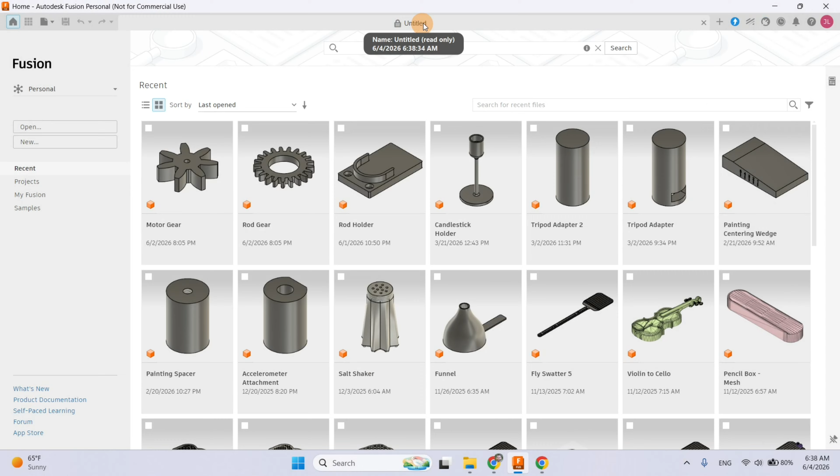If for some reason you ended up on the home page, just come back and click on this tab for your new untitled design. So this is what a blank canvas looks like. And you can create multiple designs at once.

If you're creating a new design, in this case, let's just go with a part design. The difference is that parts are for simple, single objects, and assembly is where you would import multiple parts, so multiple standalone pieces, and assemble them together. Then hybrid is just a combination of those two. I haven't really used hybrid, that's actually relatively new on Fusion. They do a good job of updating it frequently, whether that's for better or for worse.

But we're just going to go to part design, create new. And I actually want to open up and import those STLs that I just created.

One easy way to do it, I'll show you here real quick. I don't want you to be overwhelmed, but you have multiple tabs up here, and you also have multiple functions within Fusion on the drop down. We're just going to stay within Design the whole time, and we're just going to stay within Solid the whole time. If you don't want to be overwhelmed, just Design and Solid is all you need for right now to get started. But we're going to go Insert, and we'll do Insert Mesh.

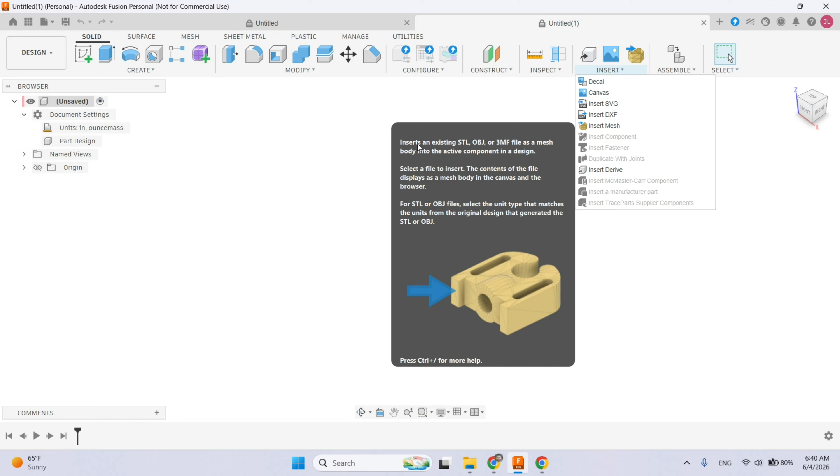The nice thing about Fusion is it has really good tooltips that pop up. You can see right here on the left, it tells you that this is good for inserting an existing STL or 3MF file. We downloaded some STLs, so that's what we want to insert.

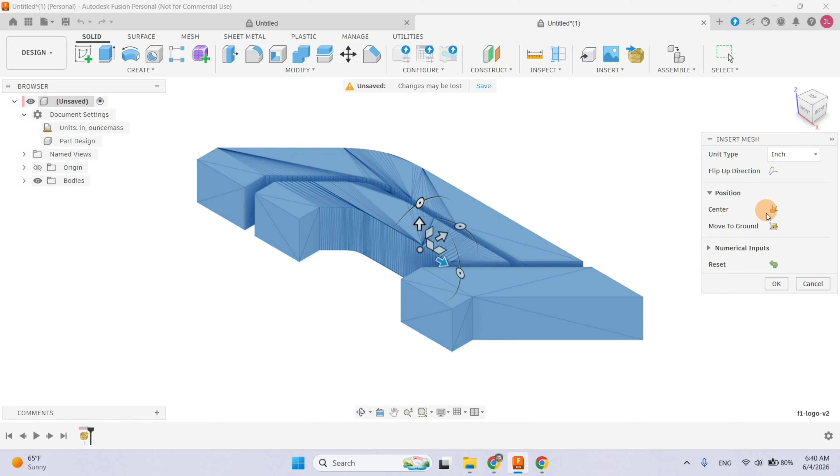We'll go select from my computer, because we didn't save these on the cloud. Let's just start with the F1 logo. We're going to open it up. Over here, we get all the options for the tool, like we could change the units that we're importing in. Let's just hit OK, and that's going to finish importing this.

Not sure if you know this, but the way an STL file works is it's just composed of a bunch of little triangles. You can see all the triangle faces right here. That is okay, we can leave the triangles there for now, and that'll be fine.

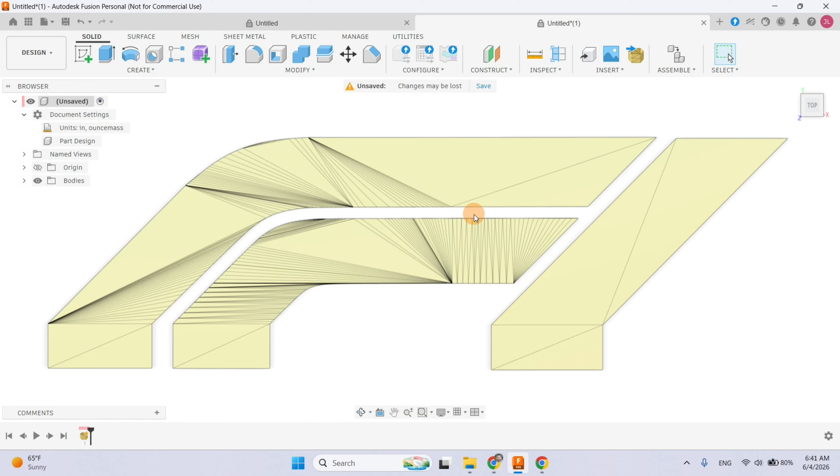But what we want to do is just recreate this design over here in our other Untitled tab. That's what I want to show you how to do, because I think the best way to start is just recreate some simple designs that somebody else has made if you can't think of any ideas on your own. If you can think of ideas, then go ahead, you don't need to copy somebody else, but it's totally okay too if you want.

All right, so this is going to be fairly simple, and I will show you how we can do this. We're over here in the Design, Solid tab, and the way you start in CAD is you create a sketch. A sketch is going to be a two-dimensional drawing, essentially, of what you want to create, and then you can create 3D geometry from there.

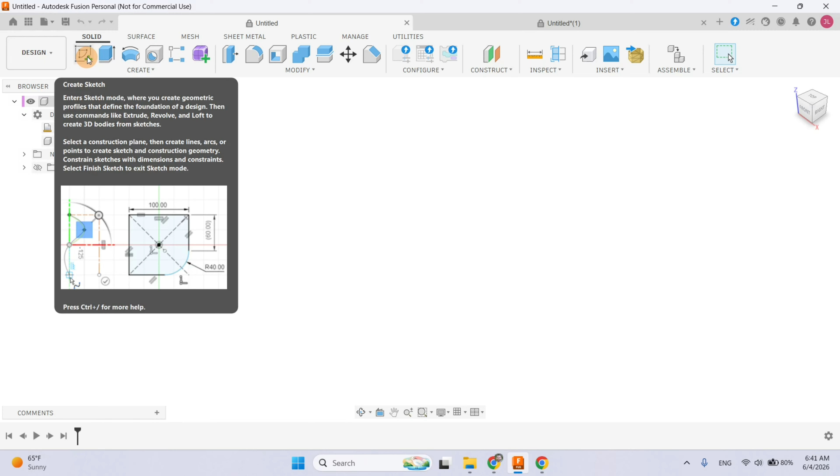But let's just create a sketch, and it's going to ask you which plane you want to start that sketch on. Also, I'll just go back a little bit. Your Fusion probably looks slightly different from mine, and that doesn't matter, that's okay.

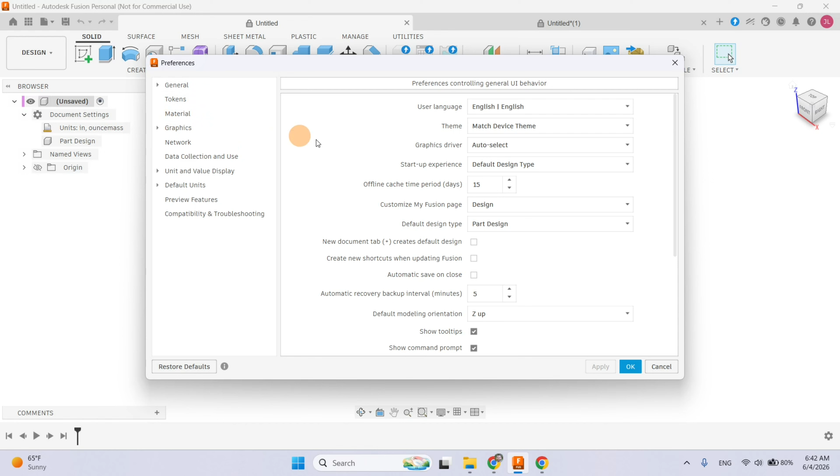But if you want it to look the same, then you can come over here to the person icon where you're signed in and go to Preferences. One of the biggest things that I did was remove the grid that sits behind. Yeah, if I can even find it.

Okay, so I was looking around for a little bit to find everything, but if you want your controls to exactly match mine, then you'll just go into Preferences, General, and the shortcuts for pan, zoom, and orbit. That's going to be how you move in and out from your part, how you drag the screen around, and everything. There are certain defaults, it's surely going to be set on Fusion when you first open this up.

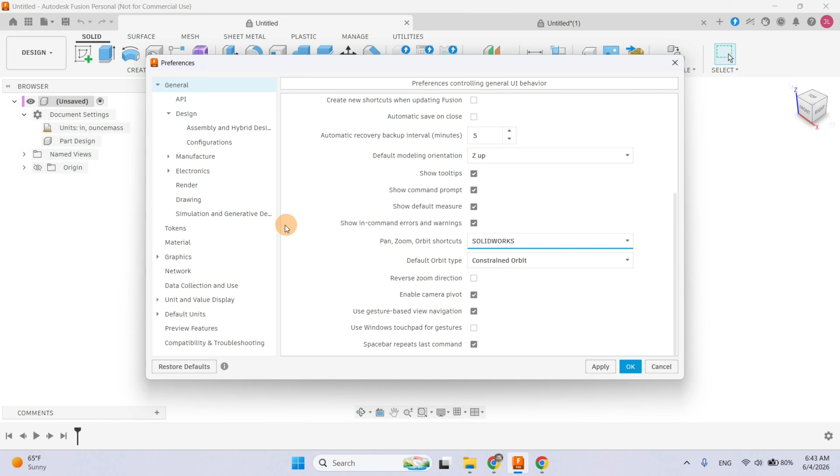I actually really like the SolidWorks controls, that's what I learned on first. SolidWorks is kind of an industry standard, so it's a very popular option. If you want to be using the exact same controls as me, just select this to SolidWorks, and that should be great.

I am also an inches guy. I live in the United States, grew up in the United States, so I prefer inches over millimeters for most of my designs, and you'll just set that over here in your default units for design. I'm just set to inches, so just hit apply when you're happy with the settings. I'm just going to cancel it because I don't want to change anything.

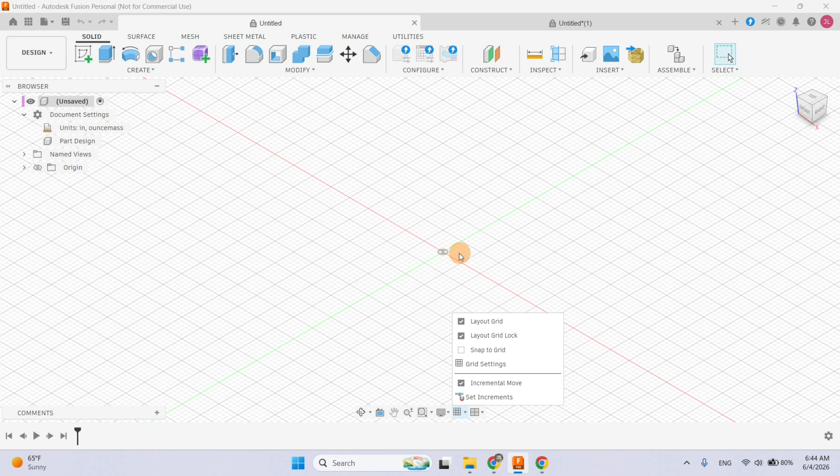And then lastly, there's a grid. Down here you have a few controls, but there's a layout grid. When you first open Fusion, you kind of get this grid that shows up in the background. I don't really like it, so I just uncheck it, I'd rather just have a blank background. So if you want your Fusion to look like mine, that should get you most of the way there.

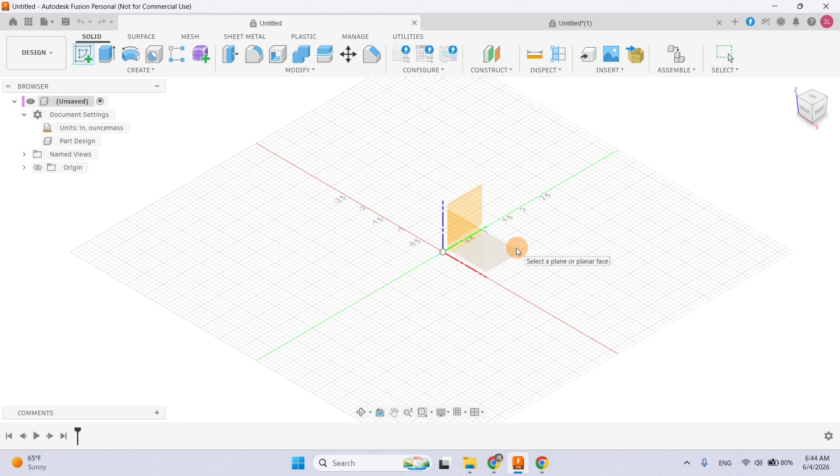Okay, now that we're here, we're going to create that sketch that I was telling you about. So you've got a plane for dividing top and bottom of the space, one for front and back, and one for right and left. It really doesn't matter which one you start with because this is an unoriented 3D space, we haven't done anything to it yet.

It's kind of like being in outer space. There's no up or down, no left or right really. But I'm just going to pick the top and bottom plane because I can imagine this F1 logo sitting on my desk and I would be looking down on it from above.

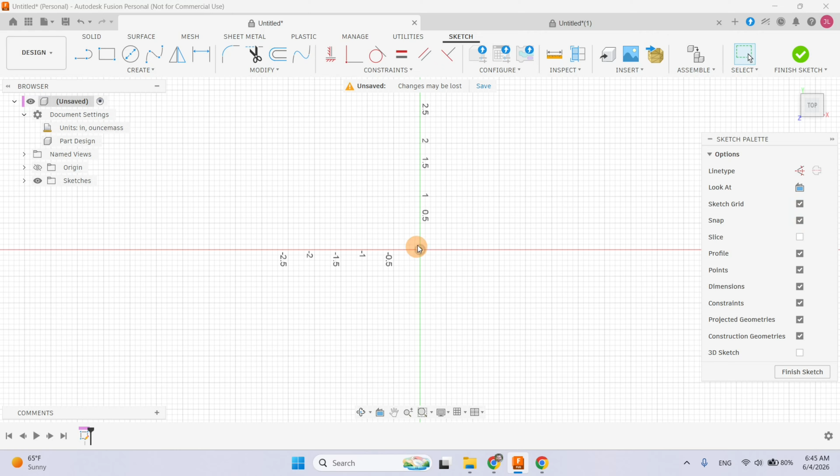Once we are in a sketch, you get a new tab. We still have the solid tab and everything else available before, but now there's a sketch tab, and there's a sketch palette on the right. It's possible you might have the sketch grid enabled. I prefer just the white background, so I turn it off. You might also have snap enabled, which makes your points snap to the grid. I don't like that either. Up to you, but if you want to copy me, just uncheck those.

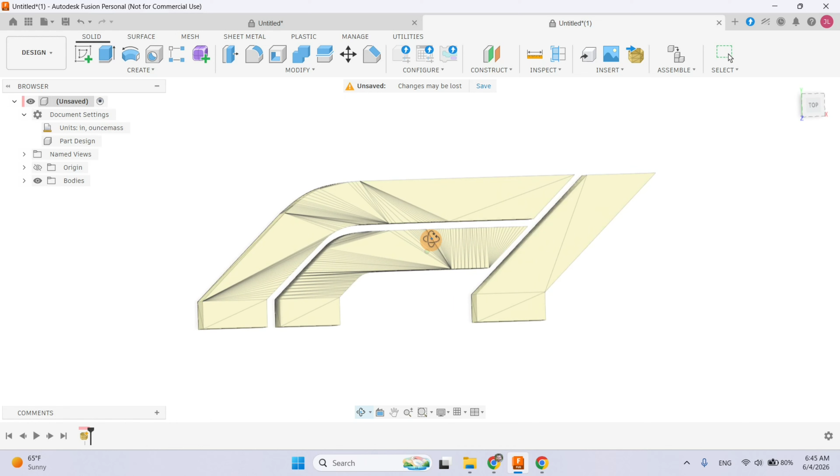Okay, so this F1 logo, let's come back and look at it. Well, it has 3 chunks of material, and one of them looks like an obtuse angle with a rectangle on the bottom. The second one is just a miniature version of that same thing. And then I guess another obtuse angle. Yeah, I don't know, I've never looked at the F1 logo that closely, so this is interesting.

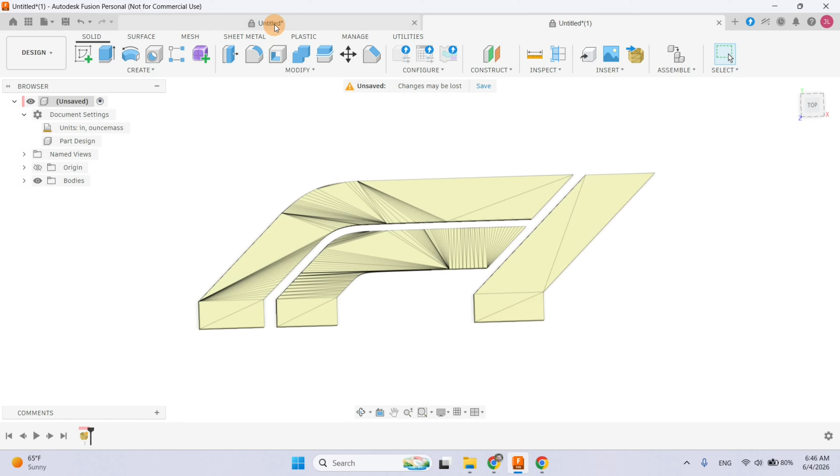But let's just copy what we see. The easiest way to do this is to grab the line tool. Under Create, you're going to see all the different 2D sketch tools. You can create a rectangle, a circle, an arc, a spline, which is like a fancy curvy line. You can create just a single point, some text. Let's start with line, that's the easiest thing.

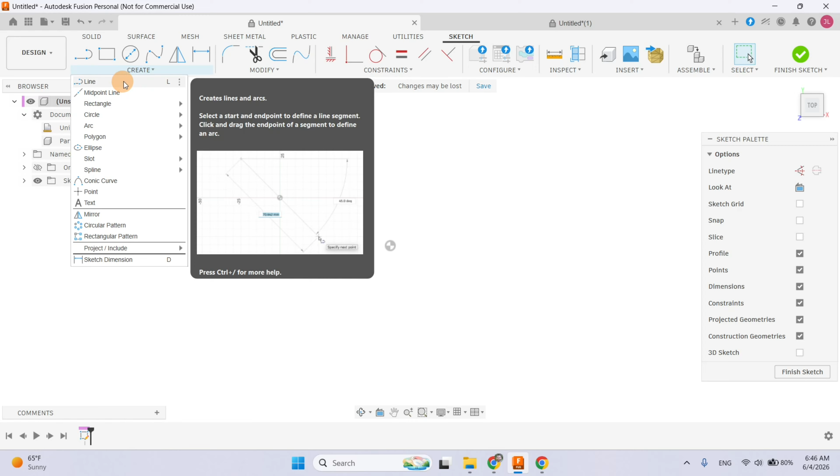To create a line, you select the line tool, there's also a shortcut up here. You click one time to place the first point of your line, and click a second time to place the second point. Then Fusion thinks maybe you want to keep drawing stuff, so it will continually let you keep placing lines. When you're done, you can either hit escape to exit the line tool, or hit this green check mark and it'll finish building the lines.

If you messed up or want to get rid of something, right now I'm still in the line tool, so if I try to click on something, it thinks I'm still building a line. That can be a little overwhelming. But if you hit escape enough times, eventually you'll unselect it, and you'll know because it won't be highlighted. So it's selected, if I hit escape, now it's unselected. You also get a little hint right around your cursor, you can see this line icon. If I were to do a circle or something, there'd be the circle icon right here instead. So I'm just going to hit escape to unselect the tool.

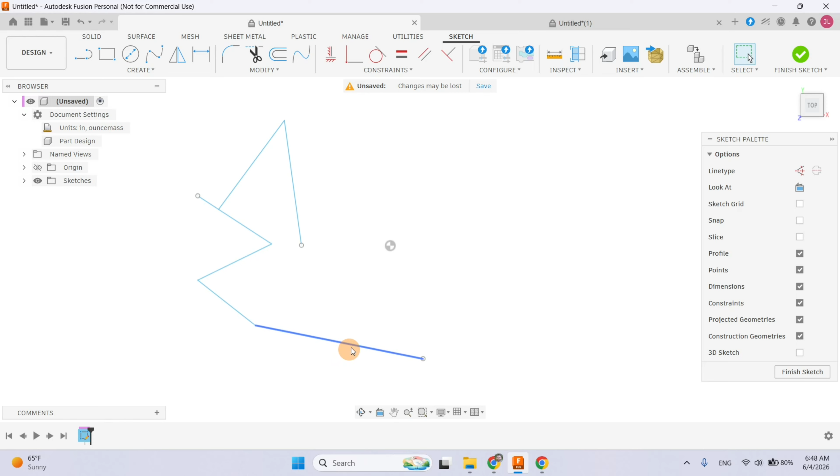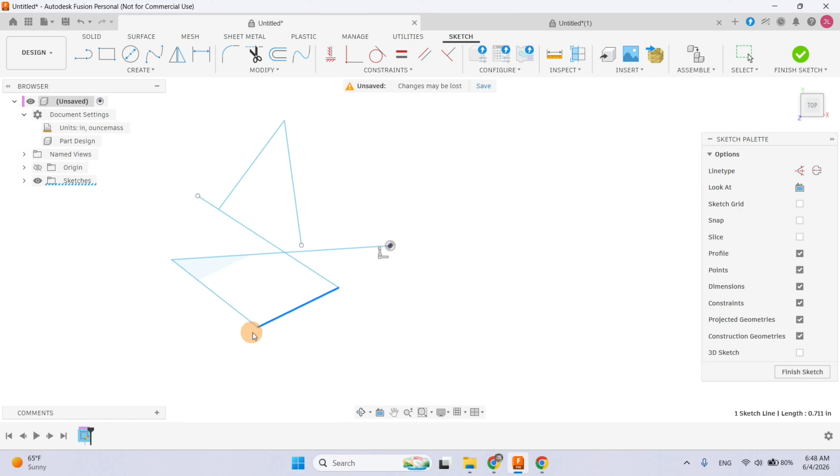Now let's say I wasn't happy with this, which I'm not. I can drag over to select the whole thing and hit delete on my keyboard. Or I can select one individual line and hit delete. This is kind of how things work. Also, once I place a line, it's not fixed forever, I can actually drag it around, grab a point and drag it. If I want this point to stay exactly on the center, I can drag it and drop it, and now it's fixed in place on that origin. So this is kind of the basics, you can just sit and play around with this. But I'm just going to delete all this because I didn't like that.

I will just warn you a little bit. CAD software is a little bit frustrating the first time, and that's normal, don't get discouraged. You might just have to do some quick Google searches to figure out how to do the exact thing. Sometimes you don't know that you have the line tool selected and you're trying to drag something around the screen and it's just creating more lines. Just do a quick Google search and figure out what you need.

I also realize I may have skipped over this. When you're in the SolidWorks controls, if you remember, we went over to preferences and set that up. The way you zoom in and out is just with your basic scroll wheel, scrolling it in and out.

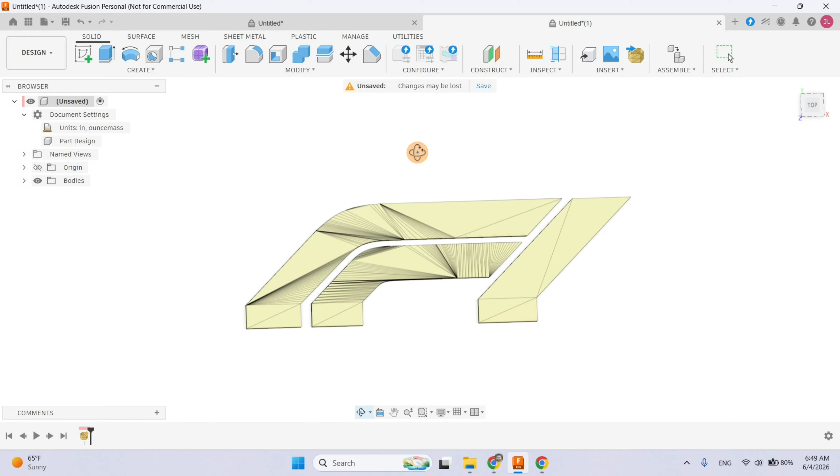And if I click in the scroll wheel, it brings up this orbit symbol. Now when I move my mouse around the screen, you can see how I'm orbiting in 3D space, getting rotation in all three rotational axes. And if I hold the control key and then do the orbit, it'll allow me to drag without rotating.

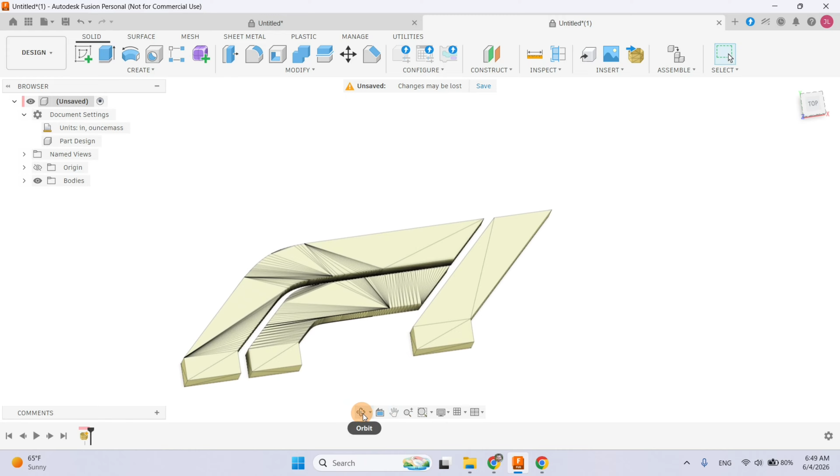All of these tools are available down here. If I click on orbit, now I can just click to orbit. If I click on pan, I can click to pan. If I click on look at... I don't know what that does. Okay, yeah, not gonna go there.

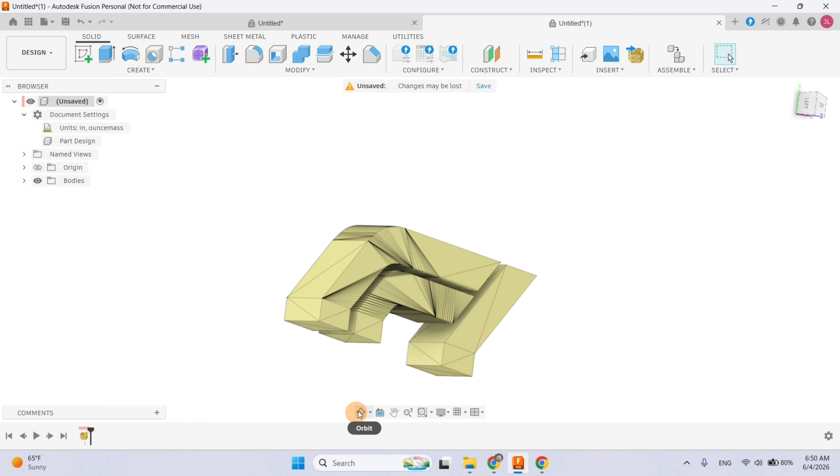I will say, if you're gonna do CAD software, you need a mouse. It's gonna be terrible without one because you'll have to use this touchpad down here. It's so much quicker to learn the hotkeys. Also, escape is gonna be your best friend—that's how you unselect any tool.

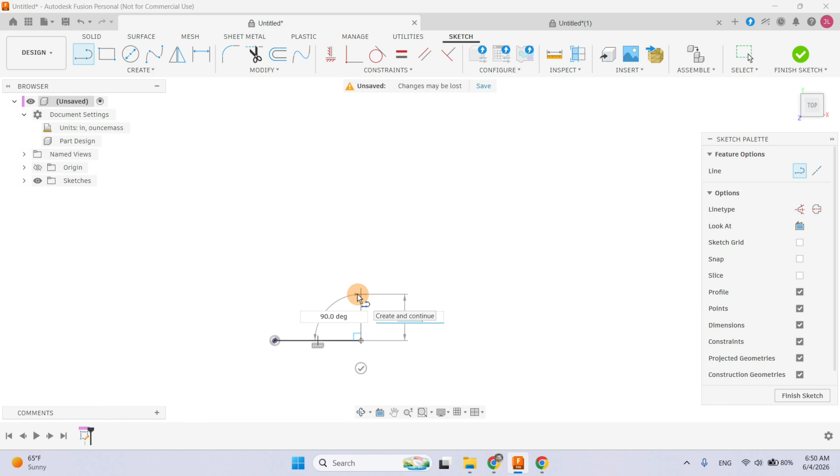Okay, coming back here, let's create this F1 symbol. We're gonna grab the line tool. I'd recommend always starting on the origin, so you have a defined start point for your design. I'm just going off memory here, but I remember there was a straight horizontal line, then a straight vertical line, and then I'll hit this check mark to finish.

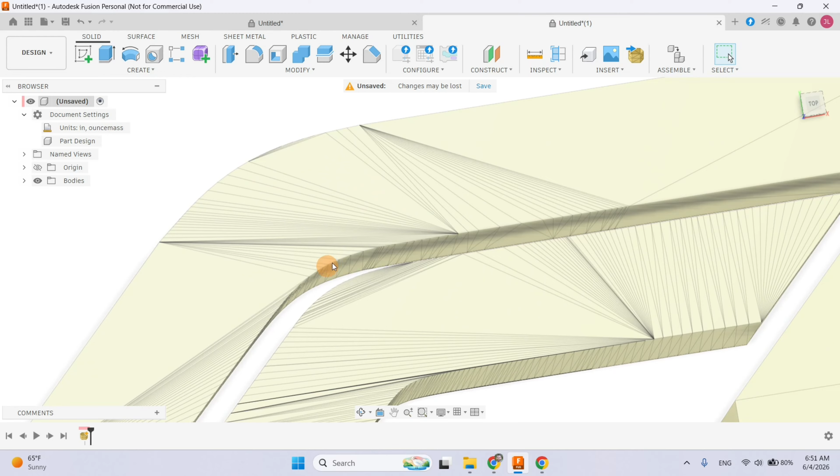It looks like there's a curved line now. Nope, there's still a straight line. Yeah, okay, there's still a straight line right here, then there's a curved line—this curve right here. Okay, followed by, great.

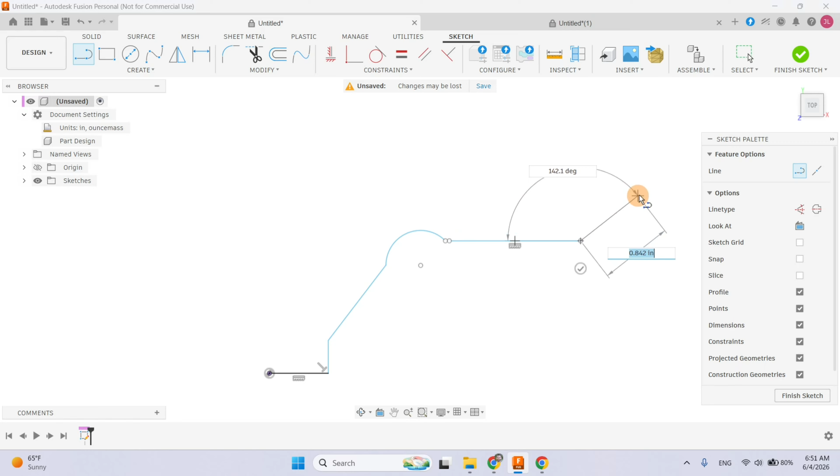So, 3-point arc. Also, don't worry yet that your points aren't exactly where you want them. I'll make it a little bit ugly to show you that you can recover from misplaced points. Okay, and then we're going horizontal.

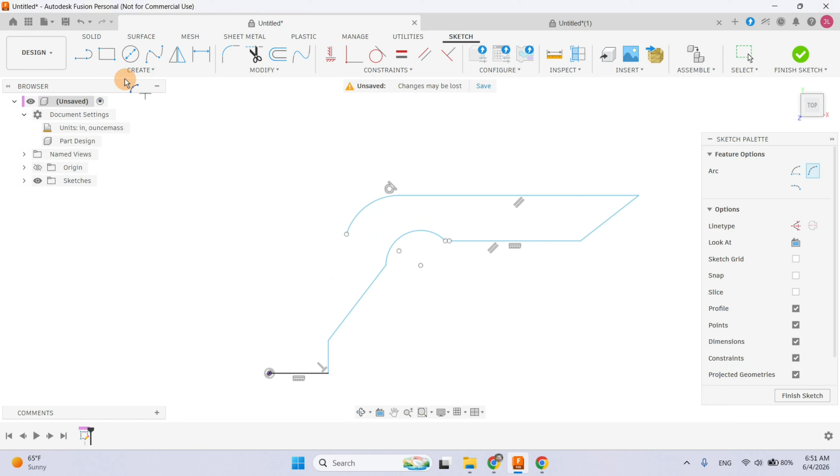I gotta look at this design—sorry, I guess I don't watch F1 enough to know how to design this thing on my own. Okay, arc, 3-point arc, great, we're just kind of placing stuff. I'm hitting escape always to deselect my tool. And great, that's pretty close, right?

That looks like this thing. You might think this looks terrible—I did this kind of on purpose so you could see that you don't have to get everything perfect the first time. And I'll point out something really important.

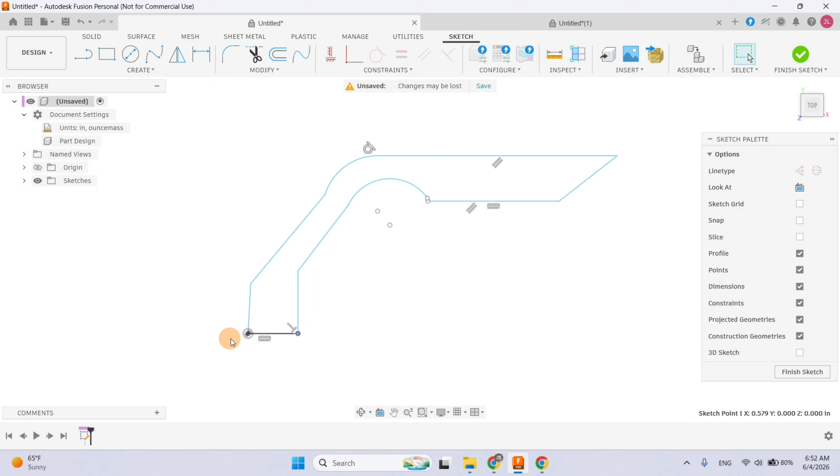Some of these lines are black and some are blue, because black and blue have different meanings. Black means the line is fully constrained, and if I try to drag it, at least the black part, it won't let me. That's because I've mathematically constrained this line—I've told Fusion this point needs to stay on the origin, and when I was creating the line, I made it perfectly horizontal, which created this horizontal constraint down here, saying I want this line to always be perfectly horizontal.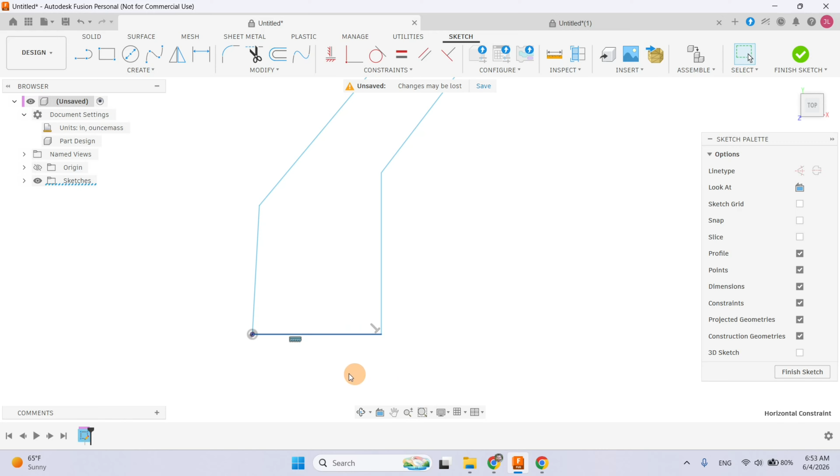If that was a mistake, I can click on this constraint icon and hit delete, and now it'll allow me to drag the line to a position other than horizontal. But I probably did want it horizontal, so I'm going to reselect it. Over here there's a drop-down menu for all the different constraints—horizontal, vertical—and if you hover over each, it'll tell you exactly what they do. I'm not going to go through all of them, but let's click horizontal.

It's going to snap to the nearest thing, which is horizontal. And now I want this line to be perfectly vertical, so I'm going to click on the same constraint. Okay, and if you saw when I clicked on this, I got a little error: sketch geometry is over constrained. That's because right here I have a perpendicularity constraint.

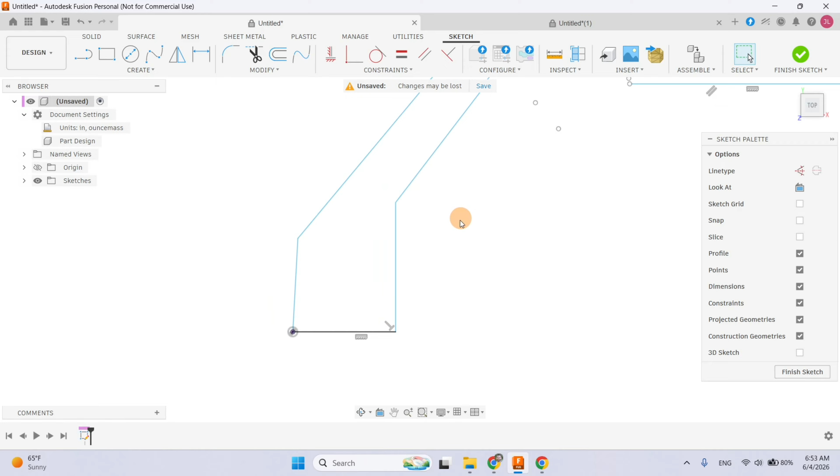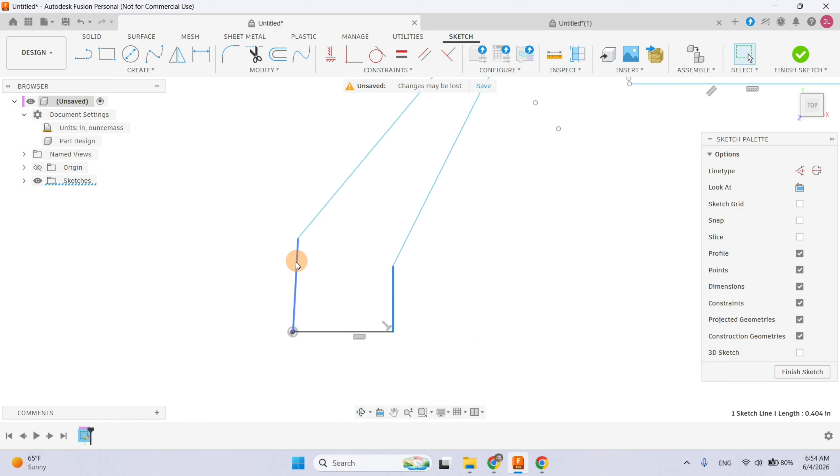Basically these constraints are just going to hover around the geometry you've created, and if you don't see them, you need to check this box over here. I have a perpendicularity constraint, meaning this line and this line have to be perpendicular to each other, and since this one is horizontal, this one has to be perfectly vertical. This one over here is obviously missing that constraint.

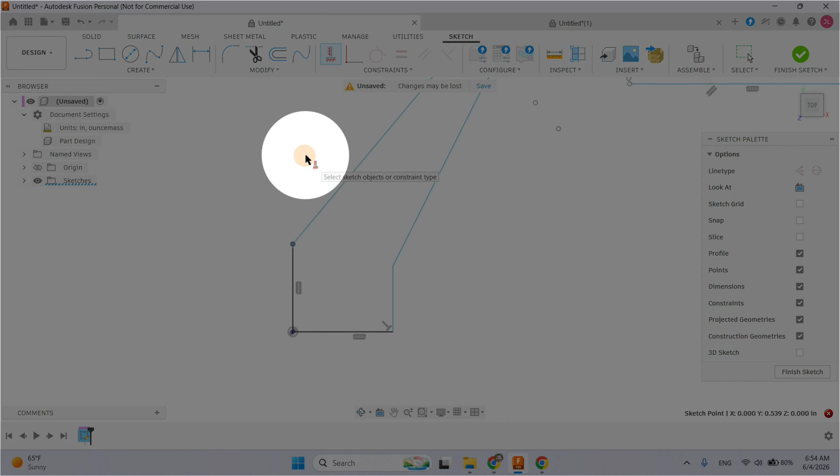So let's click on it and go horizontal, vertical, and now I want both of these lines—you'll see it turned black now. The reason it's getting upset with me is because I didn't hit escape, so I still had the tool selected for horizontal and vertical constraints. Now I hit escape, and I can drag stuff, and you'll see the black part can no longer be dragged. Now we want these two lines to be the same length.

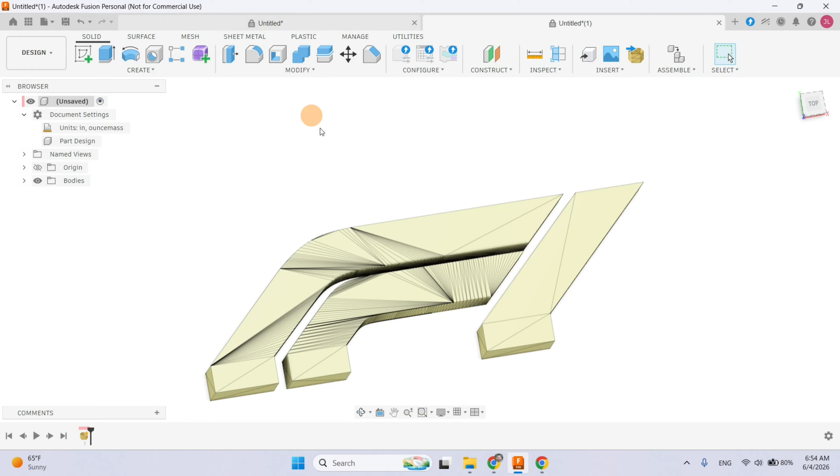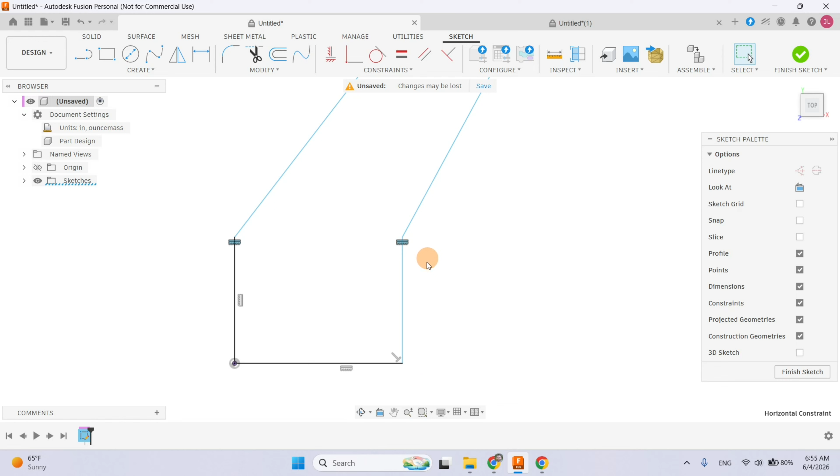Because we want this to be a perfect little rectangle down there, I can select one point, hold Control, select the second point, and I want both of these points to be horizontal to each other. So I click on the horizontal vertical tool. Now you can see that if I drag one of these lines, it drags the other one, and the constraint symbol shows up on both of these. When I click one constraint symbol, it highlights both of them, showing that they are in fact the same constraint.

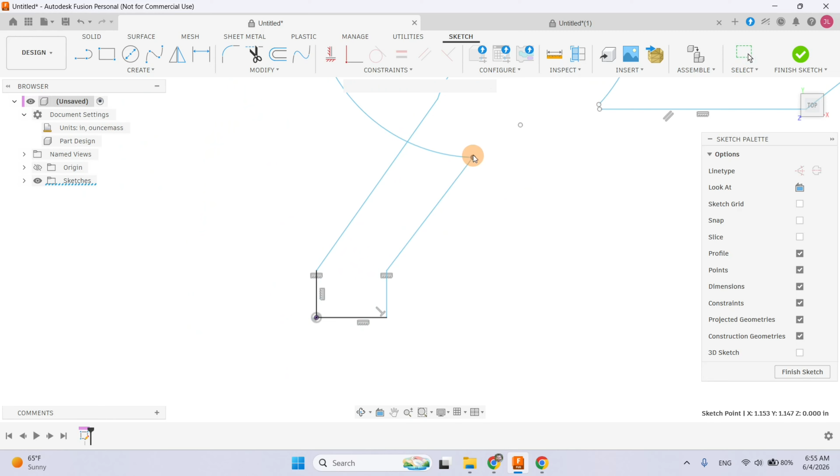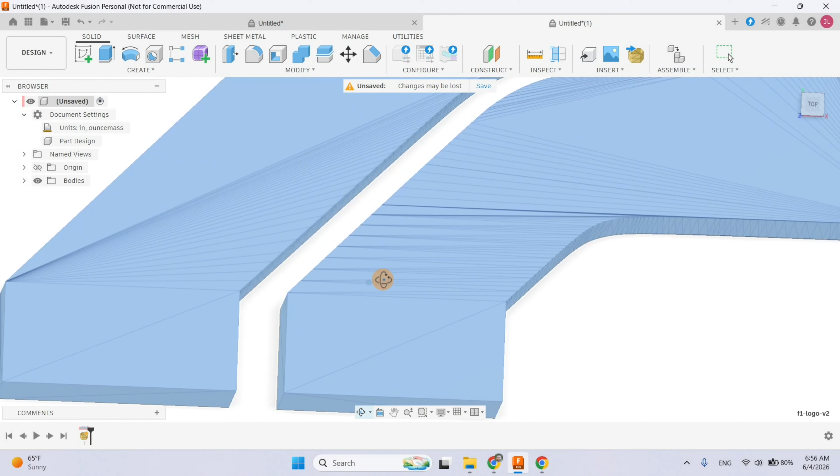Now this line right here can be dragged to any angle that I want, but I don't want this angle to just go anywhere. It could end up in some really weird spots, and that's not going to look good. So I'm creating this by eyeballing the F1 logo, and it looks like this angle - the angle between this edge and this edge. It's obviously more than 90, and it looks to be about 90 plus 45.

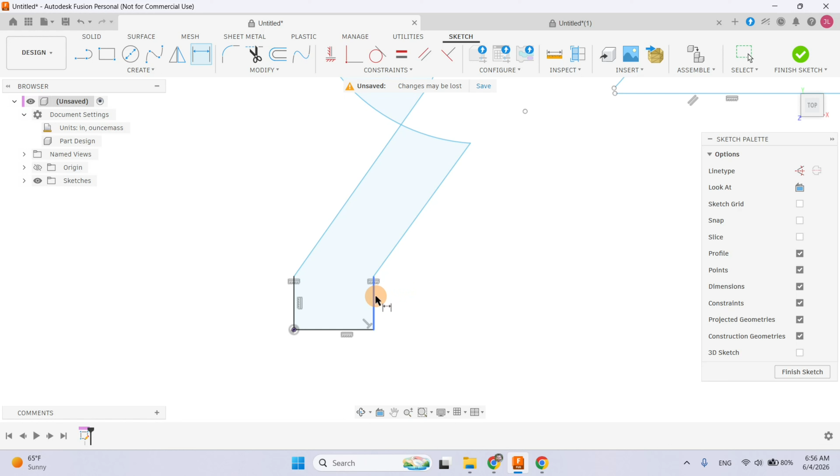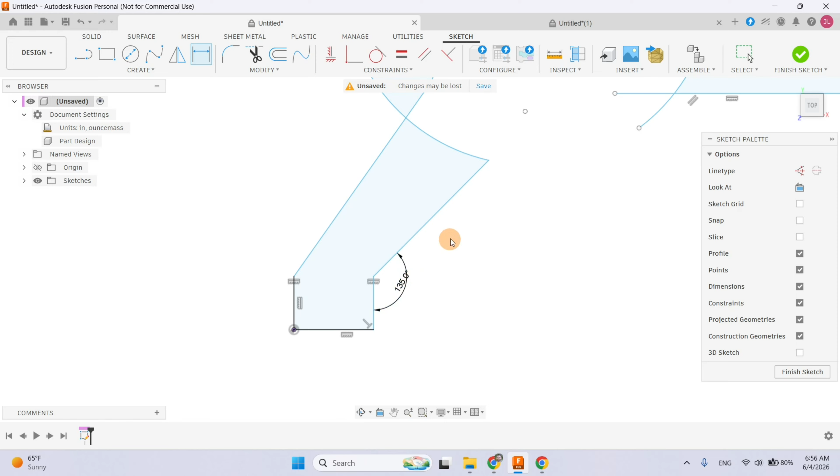So let's do that. We're going to use the dimension tool, down here in Create, at the very bottom - sketch dimensions. This is where you would set lengths or angles. I click on one line and then the other, and it allows me to place a dimension callout in degrees. We said we want 90 plus 45. I hit enter, and 90 plus 45 is 135. So we now have this angle defined, and if I hit escape to deselect my tool, I can no longer change that angle to be whatever it wants. It's fixed at 135, which is what we want.

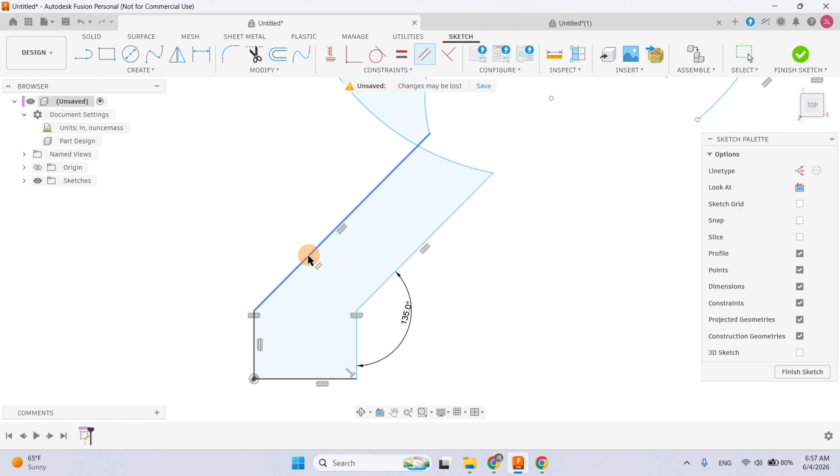We know that we want this angle to be parallel to that one, so I can select one line, select the other, and come over to my constraints - there's a parallel constraint. Now both of these lines are forever parallel to each other, and we're getting closer to the F1 logo.

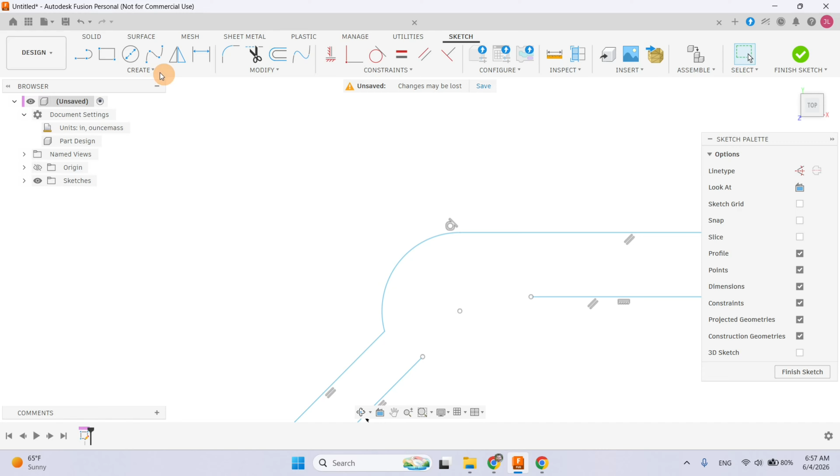So some weird stuff happened over here with this circular arc. If it ever gets too out of control, just select the arc and delete it and draw a new one. But I'm going to undo that so you can see some ways to fix this. What we want is for this to be a nice, continuous, pretty curve, and I need a constraint for that called the tangent constraint, which means this line will continuously flow into this arc.

I'm going to select the tangent constraint, and now I have the tool selected - you can see it right here, the symbol is right below my cursor. I select the one thing I want to be tangent and then the thing I want it to be tangent to. This is a great example: it made them tangent, but not in the direction that I wanted. When I deselected the tool, it's forever stuck in this weird orientation where it loops back on itself, and it's going to be hard to fix this.

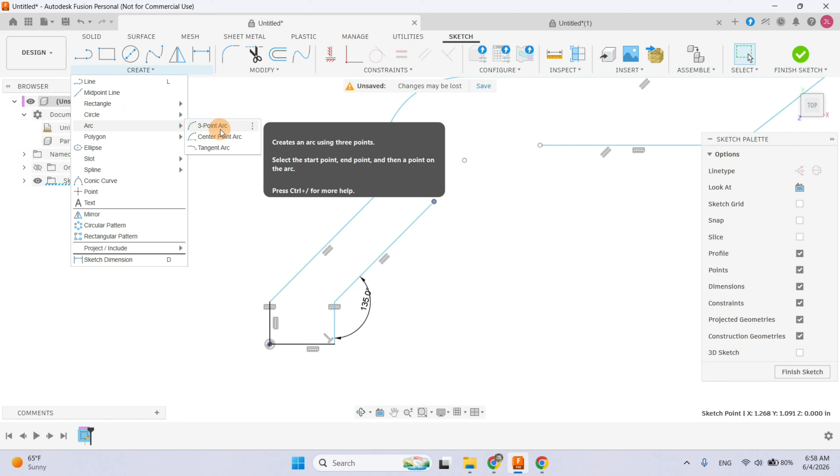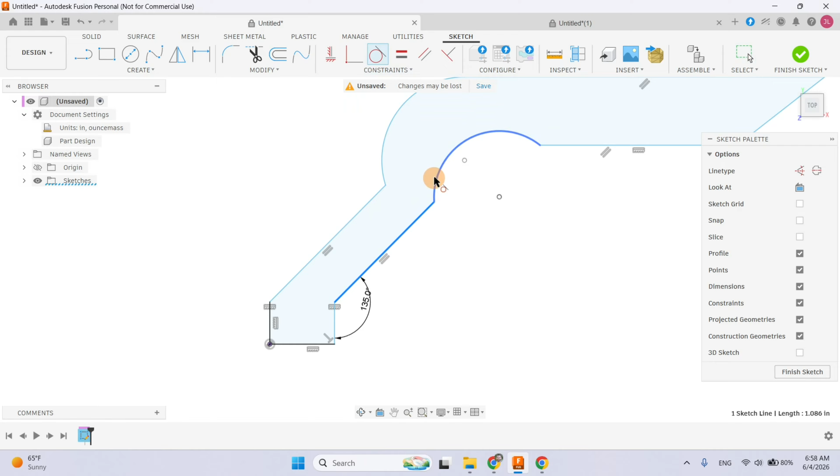So I either have to delete that constraint or just delete the whole arc, and I'm going to do that - that'll be easier. Now I can come back to Create, do an arc, and I could do a tangent arc which is automatically going to make it tangent, but I'll just start with a simple 3-point arc to show you how that works. I click on the start and the end point, and then where I want the curvature to be, so I put it there. Now I hit escape to deselect the tool, come to tangent, and select the two things - and great, it ended up in the orientation that I wanted. Now you can see that no matter how I drag this line, it always perfectly flows into that curve.

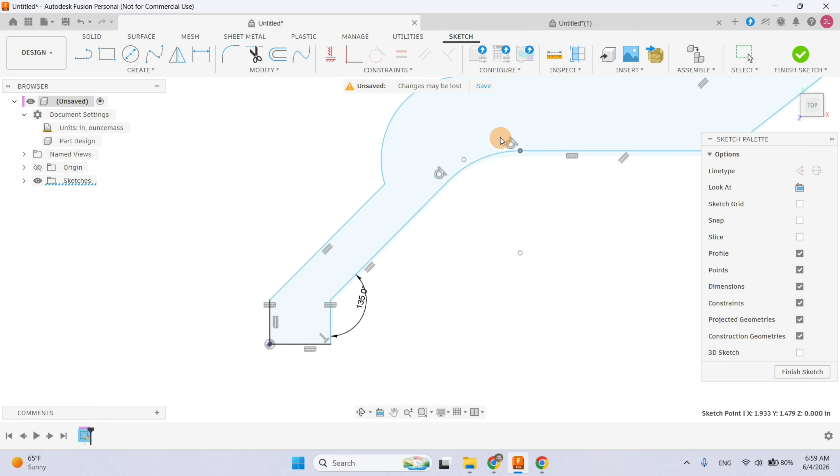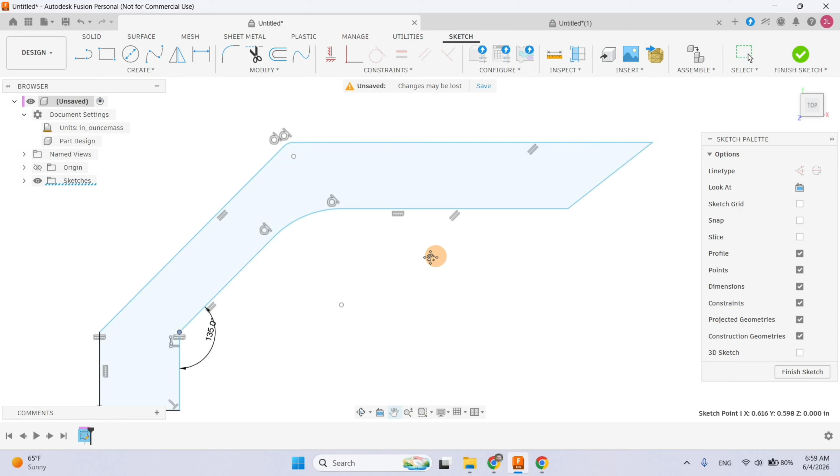We also want these two to flow together well, so we're going to come back to tangent, select the curve, select the line, and great - now we have a good continuous flow of line to arc. Let's, while we're here, do the same thing: I select one line, hold Control, select the other. They're both highlighted in that deep blue color, and select tangent. This is looking good - well, it's getting closer at least. We want to end up with this shape right here.

And we're almost there. We're going to come back to this, I don't want this to just randomly drag back and forth on how wide it is. So we're going to go back to our dimension tool, and I want to set a distance between 2 points.

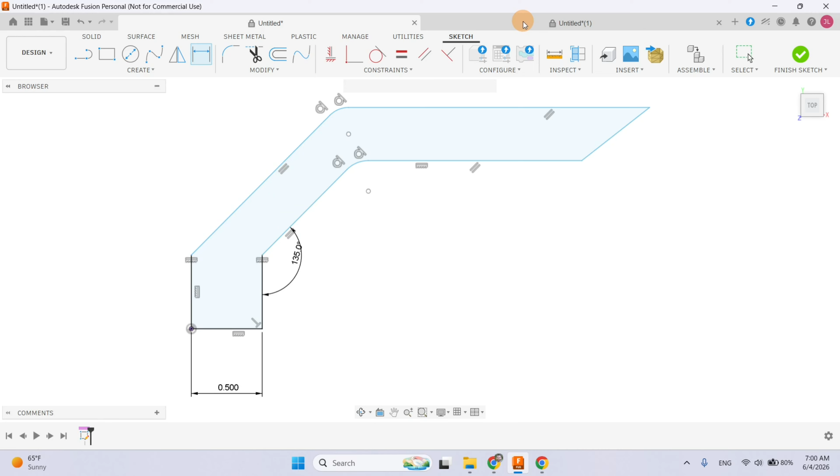I click on one line and the other, and it automatically knows that I want to set a distance. This is pretty close right now to 1/2 inch, so I'm just going to make it 1/2 inch, type 0.5, hit enter. I want the whole thing to have uniform thickness throughout, so click on this line and this line, and it automatically knows that I want the distance between them.

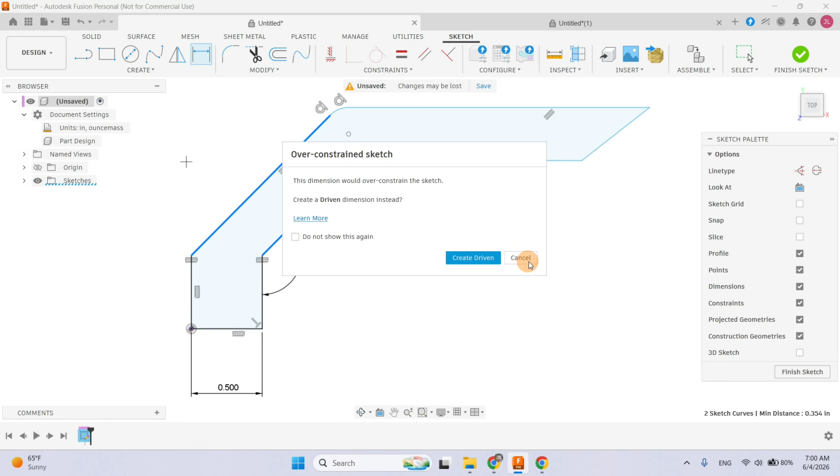It says over constrain the sketch. Okay, so that means I have some other geometry in here that's already making sure they remain that far apart. That's because these two lines have to be 1/2 inch apart, and these two lines have to be parallel and at a 135-degree angle. So no matter how I drag this, I can't change the distance between these. So I don't need that dimension there. The same thing does not apply up here.

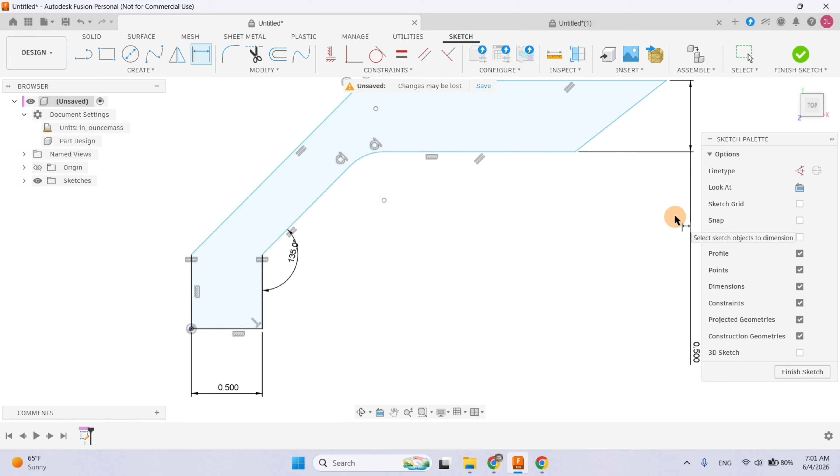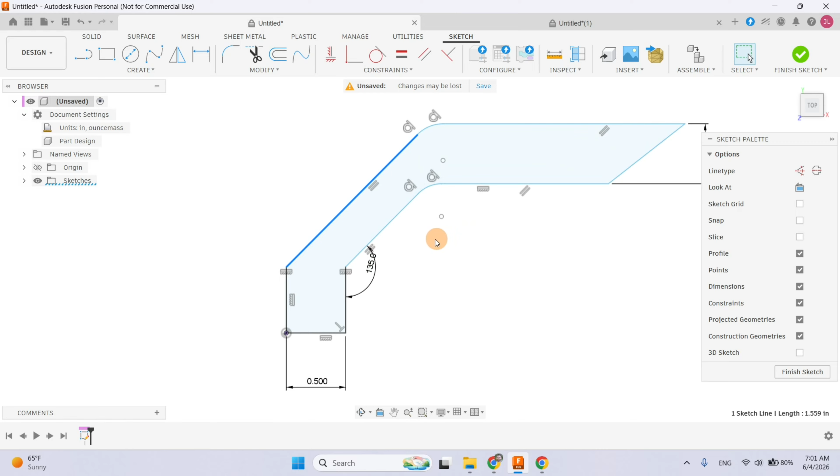So if I want to make this 1/2 inch thick, we go to our dimension, click on one end, click on the other, 0.5, enter. Whoa, that's interesting. All right, so we got 1/2 inch thick and 1/2 inch thick, and this is looking a little funky to me for some reason, but let's see what we can fix.

Sometimes it's just a constraint that needs to be there. I know that we want this point and this point to always stay vertical with each other, basically the end of this line and the end of this line. So I go back to vertical constraint, click on both of the points. Now these are fixed in space.

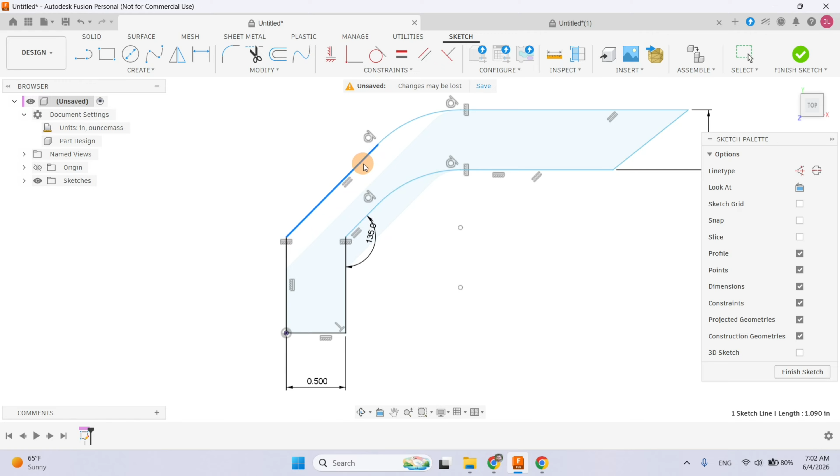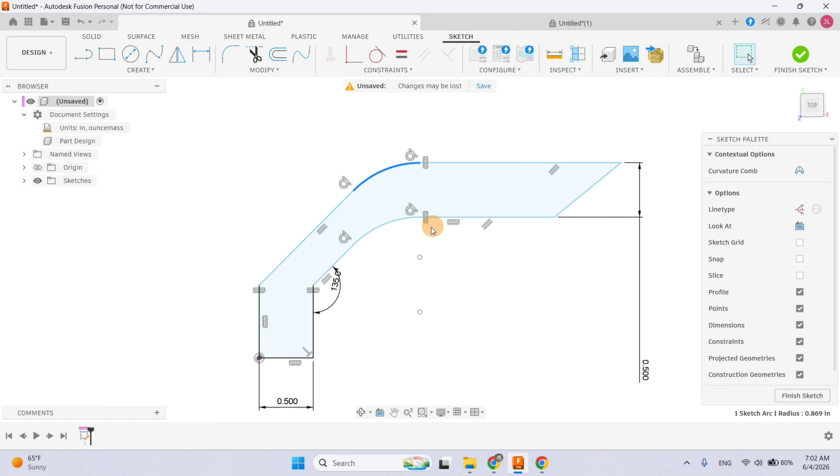I see what's going on. So this curve can change to be any sort of radius or diameter, however you want to look at it. I think we want both of these to be similar to each other, and also just so we can narrow down what our undefined constraints are, I'm going to use the dimension tool and set a length up here.

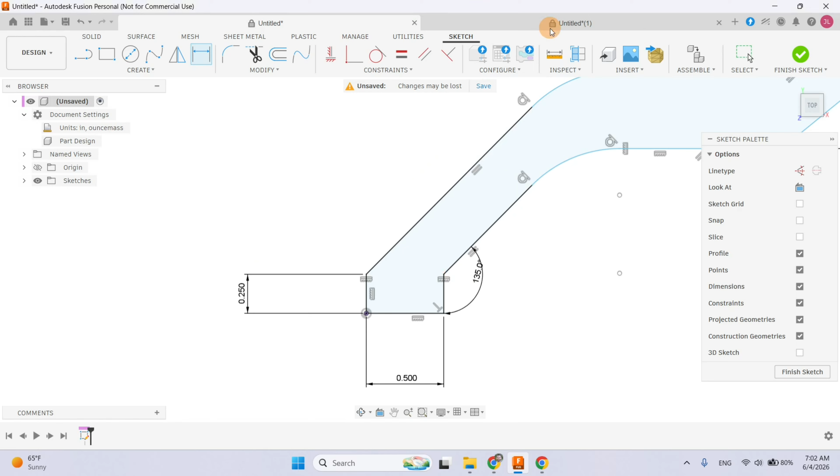Let's go 0.25, because we know from this example that that little rectangle down there is pretty small. So we got 0.25. Oh goodness. If you ever hit the wrong key and end up in a weird spot, there's a view cube right here, and you can just click on the orientation that you want to be in.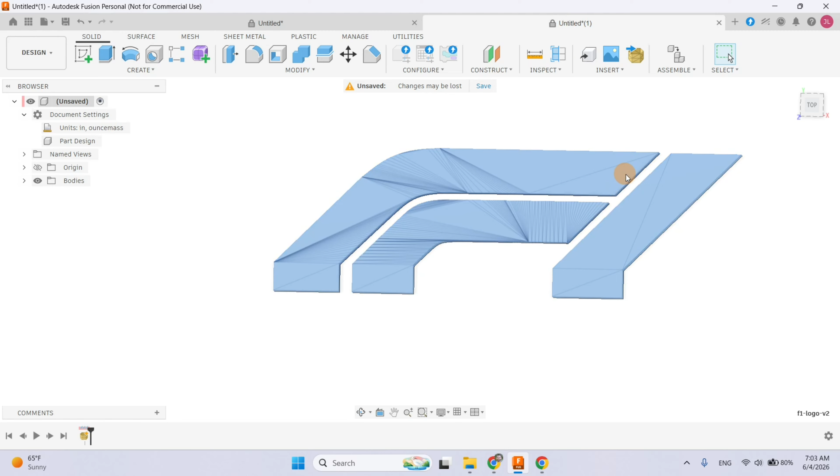Okay, so we're back, and we need to define the angle right here and then the length of this segment. And looking at this, okay. The point of this exercise is not to perfectly recreate the F1 symbol, it's just to have a target in mind as I am learning the CAD software.

So I'll show you what it looks like to add this dimension. Let's go 135 again, why not? That looks great. And so now I can grab the blue lines and figure out what is still unconstrained. It looks like it has to do with these curves right here, these arcs.

Just for fun, I'm going to delete this vertical constraint, and I want to see what happens. Okay, so now the curves can move around freely. These points right here are the centers of these arcs. I want to try something, which is I want to put these two centers right on top of each other. So I'm going to select one, hold Control, select the other, come over to Constraints and do Coincident, which makes 2 points lie on top of each other.

Oops, when I click that. Okay, so that is not going to work. It failed to solve. Please try resolving dimensions or constraints. Okay, let's just finish this up real quick. I'm going to add the vertical constraint back in.

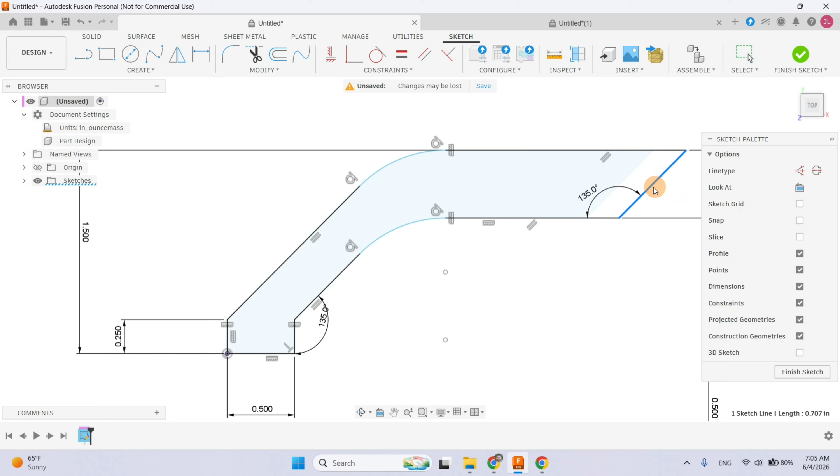And now you can see there are only a few lines that are still light blue geometry, and it looks like it's the length of this F1 thing. And I would say that looks pretty close to the example that I was looking at.

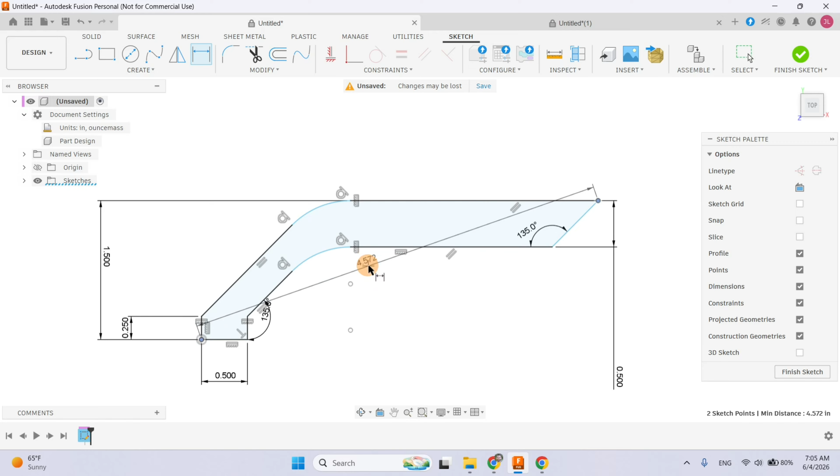So I can set distance from this point, the origin, over to this point. And you'll notice that if I'm at the diagonal, it'll assume I want a diagonal distance, and if I come above it, it'll assume I want a horizontal distance. So sure, let's do 4.25 inches. Hit enter. Okay, I hit escape to deselect the dimension tool.

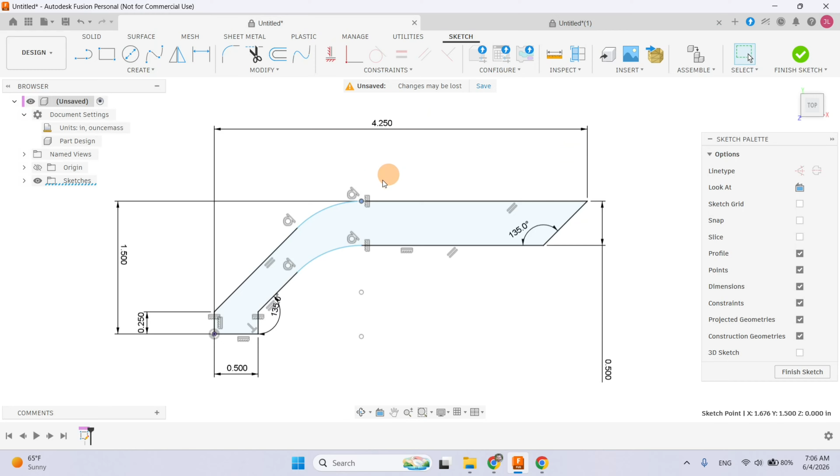And now, okay, so this is the last thing, is the width of this arc. And I'm just going to drag it to what I think looks similar, because I'm just trying to copy this.

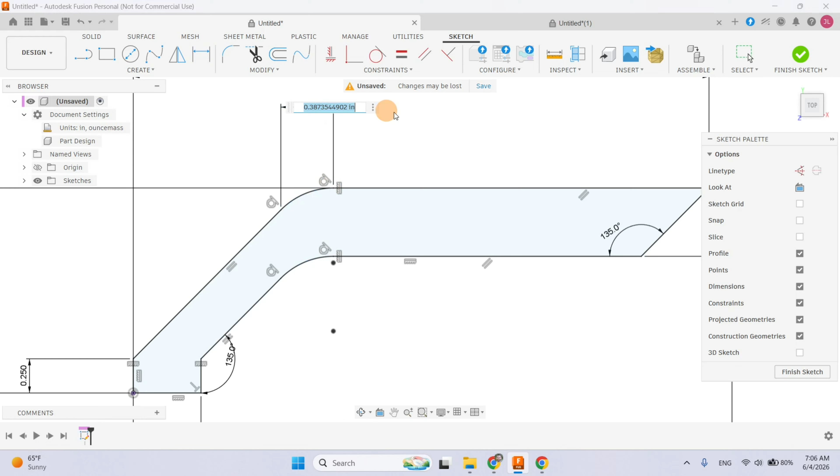Let's go about there. Why not? We'll come to our dimension tool, and essentially we need to set a horizontal distance for the length of that arc. Let's go 0.4 inches, hit enter, and everything turns black.

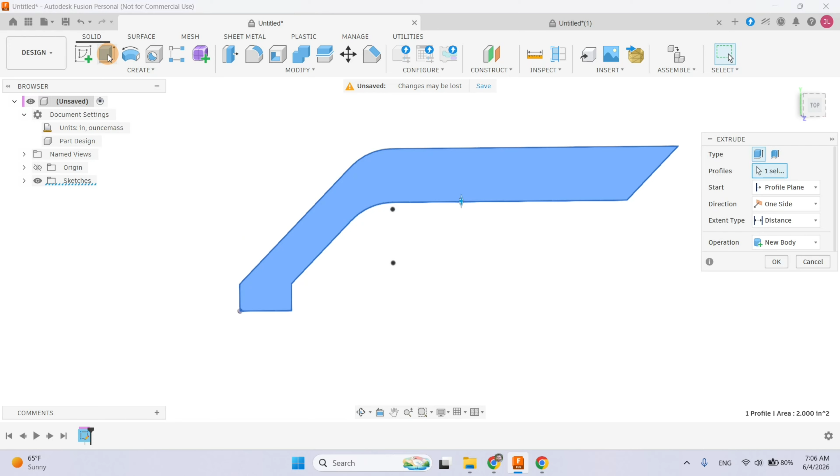I can no longer drag anything, and if I hit finish sketch, we've now created this sketch of part of the F1 logo. Over here in the solid tab, we hit extrude, which means it will add depth to a sketch profile. I click on it to select the sketch profile, and it auto-selects it because that's the only one that exists, so it assumes I want to use that.

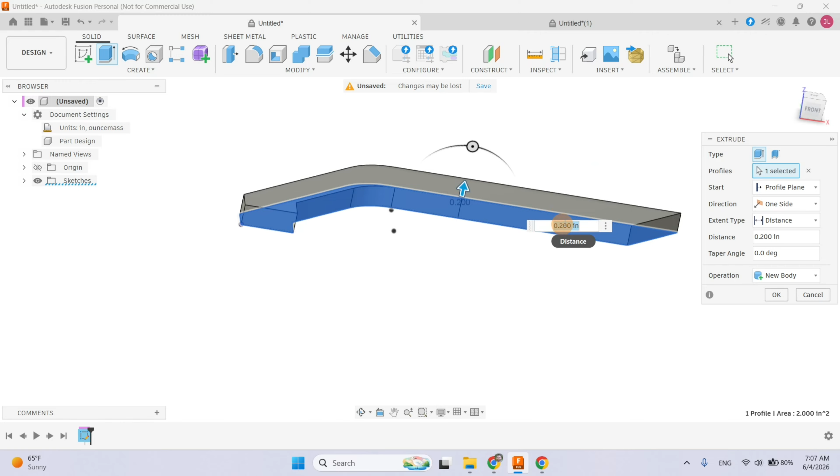But over here on the select button, I click the sketch and this arrow appears, and I can just drag it to the height I want, or type in a number. Let's say we want a quarter inch. We're going to go 0.25, hit enter, and it closed the pop-up tab right there.

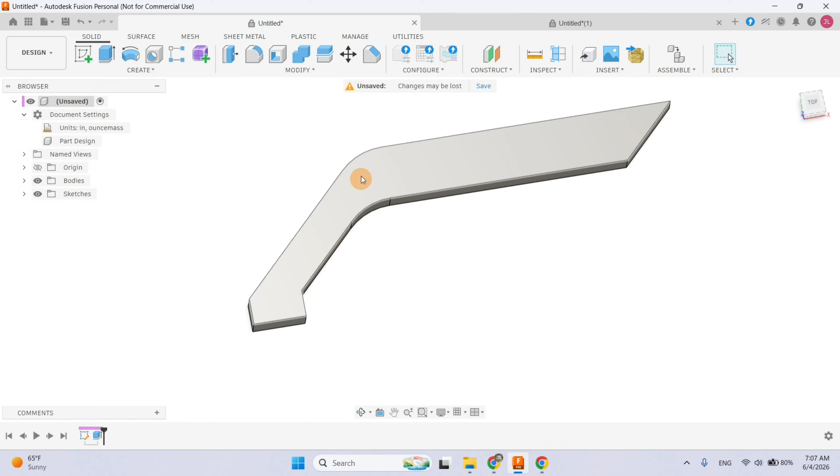That would be the first part of this F1 logo. It doesn't look exactly like it, clearly not, but that was kind of a start. And if I ever wanted to go back and change any of the things that I made, you have your

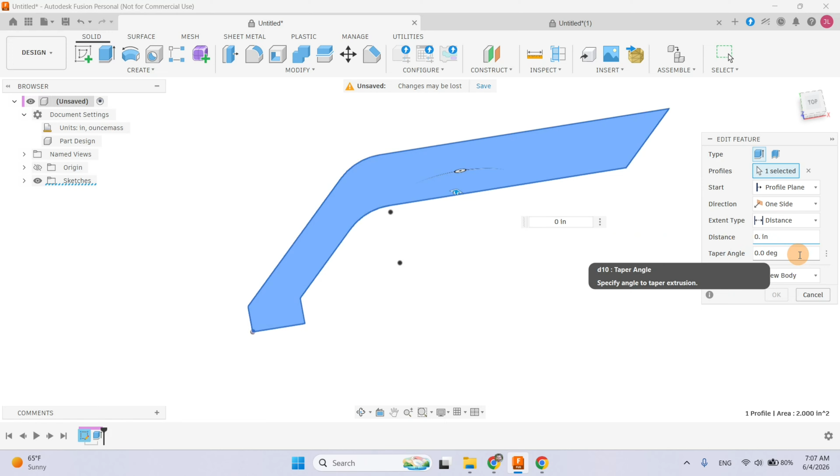history of timelines down here - sorry, your timeline of history down here. I can right click on this feature, hit edit feature, and now it lets me in this dialog box. Say I wanted to make it a little thicker, maybe 0.3 inches, I could change it and hit OK.

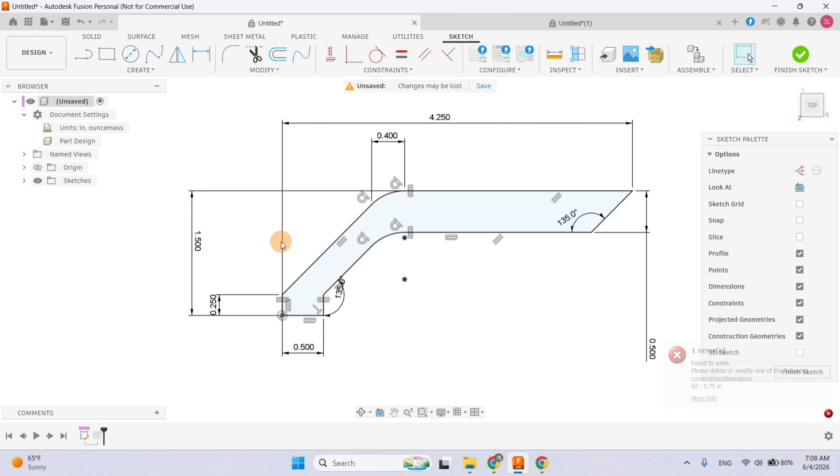If I wanted to edit the sketch, I'm going to right click, edit sketch, and voila, I'm back here. I can change any of the things. Looks like in reality this probably should be - and I can double click on a dimension to edit it. Let's try 0.75. Okay, I didn't like that because it's interfering with another dimension.

But anyway, these are the things you'll learn if you just open the CAD software and start playing with it. Just try to copy something super simple. And if you get stuck on something or want help, please leave a comment below, and I can create

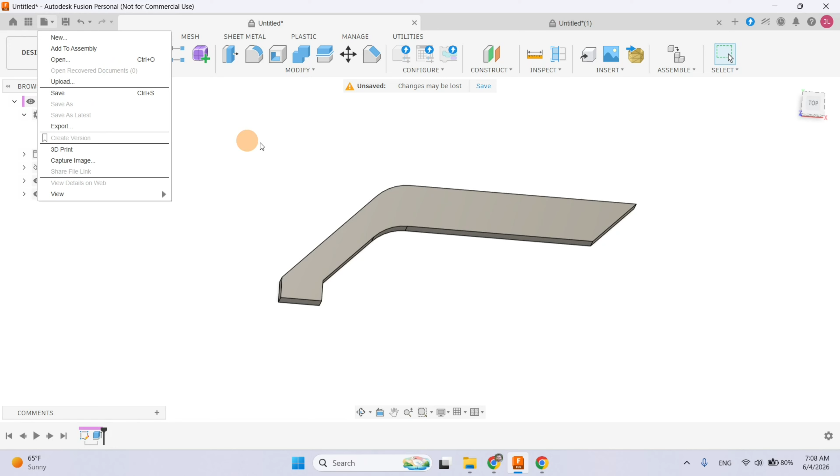a video addressing some common difficulties and concerns with CAD software. But when you're happy with your file, you're just going to come over here, hit save, and if you're ready to 3D print it, underneath file, click 3D print, select the body or the part of your design you want to print, hit OK, and then it's going to ask where you want to save your 3MF file. I think it used to have STL in here, but 3MF is better in my opinion anyway. So you could save it to your desktop and then use it from there.

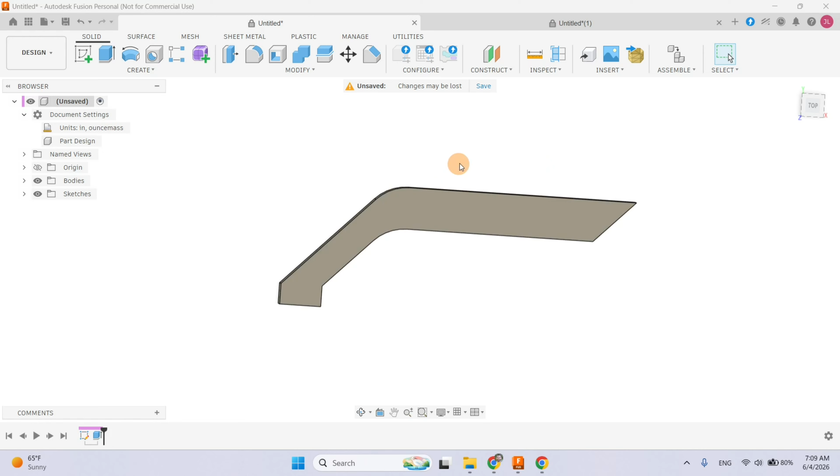All of this is to show that today you can start learning CAD, today you can start creating, and you don't need anybody's permission, and you don't need to spend a lot of money, and there are resources everywhere that can help you. I don't want you to feel overwhelmed because there are millions of resources. So the best thing you can do, rather than just looking up a ton of YouTube videos right now on how to do CAD, is just download the software, try to do something, and you'll figure out where you're stuck and where you need help.

And that's where you can search a really specific thing, find a very specific YouTube video - like, I'm stuck, I'm frustrated with this one thing, and this is what I need an answer to, this is what I need help with. As you can see, I am an engineer who does CAD quite frequently, and sometimes I'm still figuring things out in the CAD software or with the design. So it is normal to not know what all of the buttons do all the time and to struggle a little bit with creating a design.

So just start. Just download the CAD software, open it up, and create just the simplest thing - maybe just a circular rod - and go print it and enjoy being a creator. You're just going to continue to get better and better and learn more and more. And it's going to be so much fun and bring so much joy to your life to begin creating and feel that empowerment that comes from creating new things.